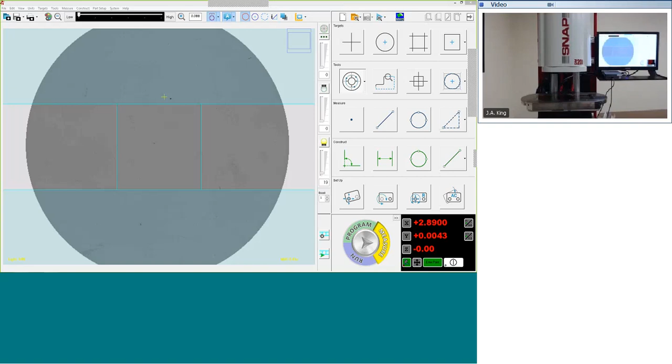I've got a couple of parts with me that I'm going to demonstrate for you, and we'll demonstrate how the measurement happens. I'm going to back up and let Colin do my zoom in for me with the camera. He's actually bringing the camera in closer to the gauge so you can see it.

You should have 2 panels on your screen, one showing the machine, the other showing the software on my screen. With the machine, the only thing we're going to see today is lighting and things that are moving. So let's talk about a couple of things to measure.

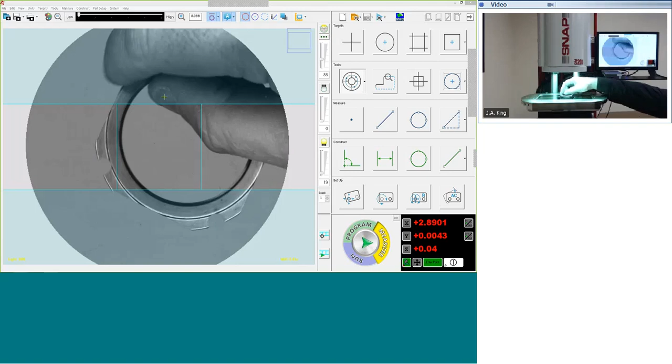I'm going to bring in a part. You can see this ring, we call it a gasket. You can see it on the stage now, and you can see the size of it.

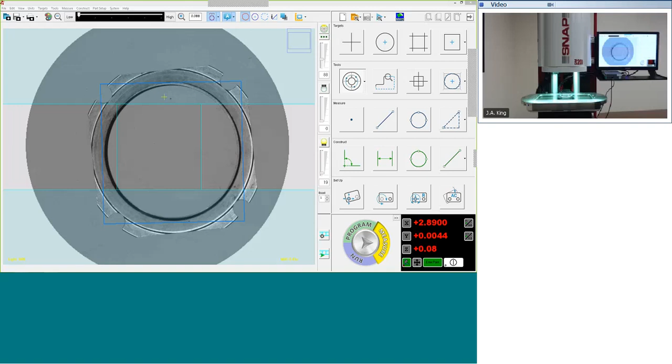You can also see, I put a little top light here so you can see it. You see on the screen that this unit, the whole part, is constantly in focus, which is unique to these type systems. They have large depth of field, meaning that we can measure all parts without having to refocus. The system is always in focus. There are some optimal locations, but for the most part, it's always in focus. As we change mag, that focal depth becomes smaller.

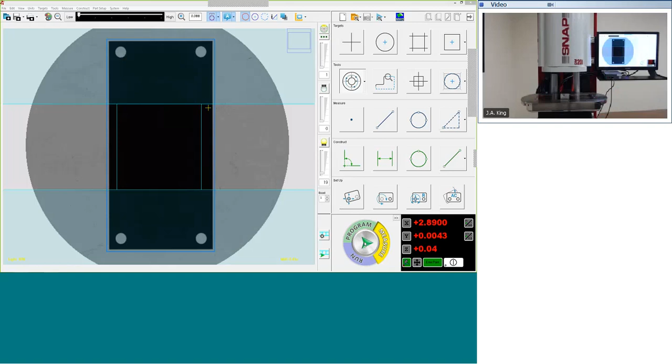The lenses on this system are fully telecentric no matter where you are within the path, meaning that we can lower the stage, as we're doing now, and you can still see the part is still well in focus, and we can raise the stage. Anywhere we take our measurement within this stage volume, our lenses are fully telecentric through the entire zoom range. Basically what that means is that wherever you are in the zoom field, the particular size of the part that we measure stays that way throughout the focal length of the camera.

So that's looking at that part. I'm going to put another part on the stage. It's just a block, if you will.

Let's talk about how we measure this. A simple walk-up measurement is just putting the part on the stage, and on the software screen in the lower right-hand corner, you'll see a wheel there, a colored wheel. This colored wheel has program, measure, and run. And then you'll see a green blinking arrow.

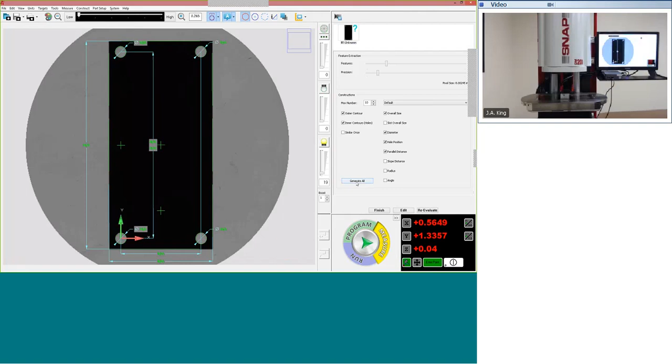That same blinking arrow, there's a button on the front of the machine that an operator can come press, and it's going to do the exact same thing. So when we press that green arrow...

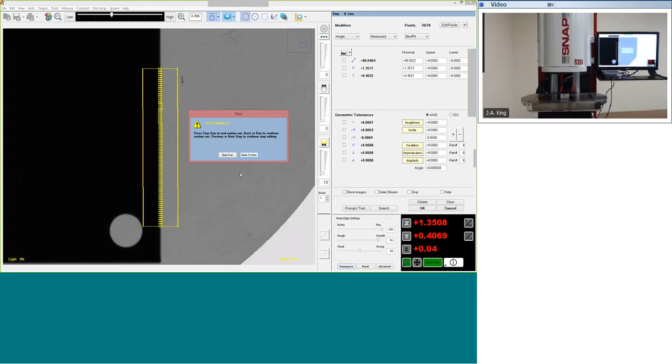The machine looks at the part that's there and does some automatic measurements for us. So we can see in the field of view that the machine picked up that there were 4 holes, and it measured all 4 holes. It also picked up distances between those holes, an overall height of the part, and a width.

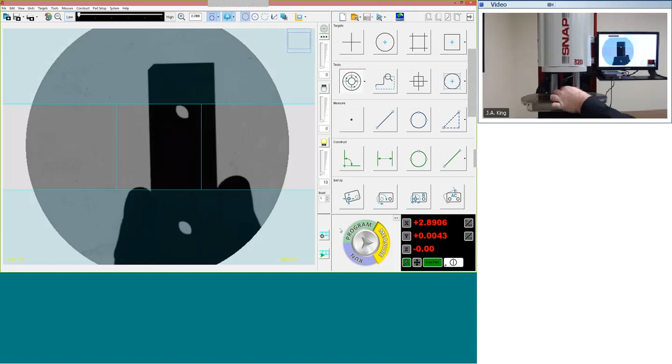And of course, with each one of these, we can also add and take away dimensions. Suppose this upper left-hand circle, showing in the screen up here, if we wanted to know the diameter of this circle, we can just highlight the dimensions, and it'll tell us what each one of those are.

Now this has become a program. We can select, over on the right-hand side of the screen, we have a button here that says Generate All.

And it's now complete. We select the Run key. I'm going to slow the speed down so we can see it. You can see the edge detection features going out and measuring each item that was identified.

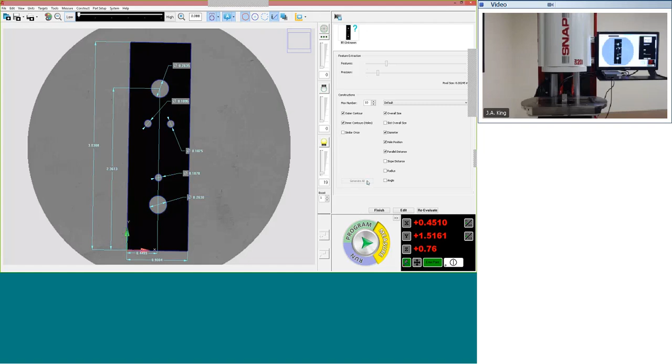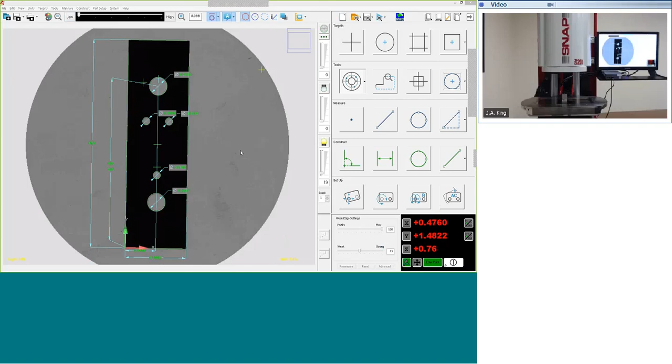Give it a moment to run there. Okay, so each item was identified and measurements taken on the screen. We can do the same thing by turning this part over.

Select New here, we don't want to save that. And of course we can go into our measure mode, and here we can adjust the stage. Let's say we have a really tall part, such as this one.

We'll put this on the stage and move the stage down a little bit. Under storing a new position, we'll select the measure icon, the green icon key. Just grabbing the part, and you can see that it has completed a measurement.

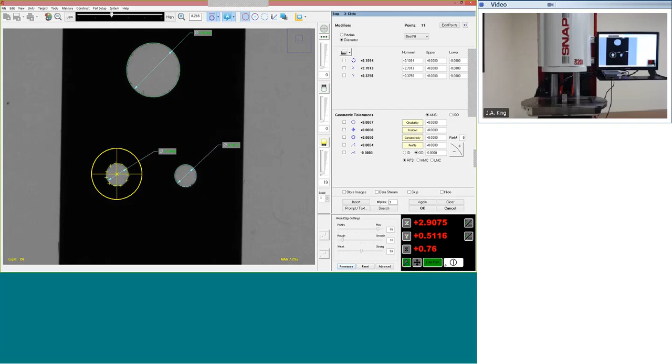We have length, width, circle diameters. It calculated an origin in this lower left-hand corner and went ahead and gave us the hole locations as well.

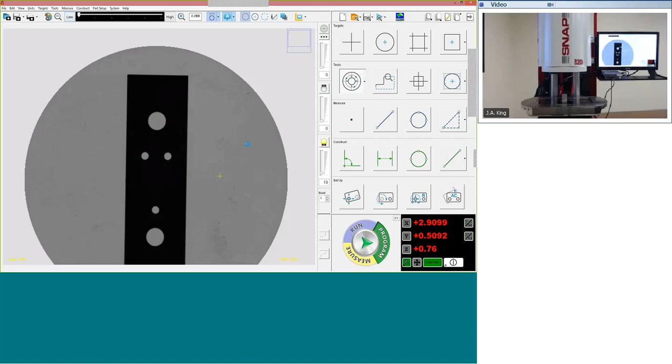We can select Generate All, and we'll go into our program mode—excuse me, our edit mode. Run this. Again, I've got this running slow here so we can see the edge detection. Select Finish.

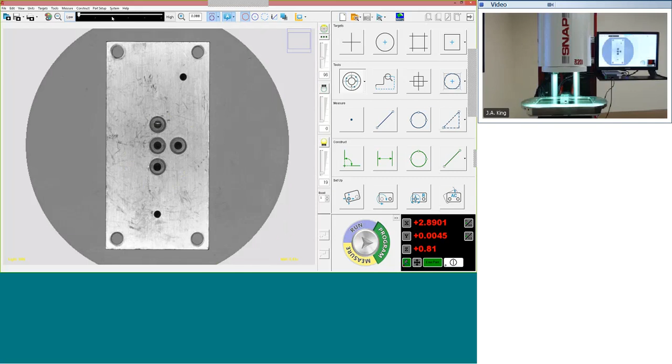We can also add items if we wish, so we have edge detection tools available as well. If you just want to come up and start measuring items, we have what's called a feature finder. If we just want to know the diameter of a circle, we can zoom in—we still have the full 4 inches available for the field of view.

You notice I can move the part around and not actually move the stage. So even though we're zoomed in looking at a smaller area, we can still see a complete 4 inches in the field of view.

And from here we just click on that circle, and it gives us this diameter. We could do the others as well. Give that a double click, and we can measure this diameter as well—this is that 100 thousandths diameter.

And go over and measure again. So you can just see with a couple of button clicks, all I do is come up and double click these two circles. We can measure diameters, and we can also get length and width. We want to know the width between those two—just click the width icon, and it gives me the width of 337 thousandths between those two.

So just walking up and measuring a part is very simple as well. You just put the part on the stage, and with a few mouse clicks, we're able to generate length and width.

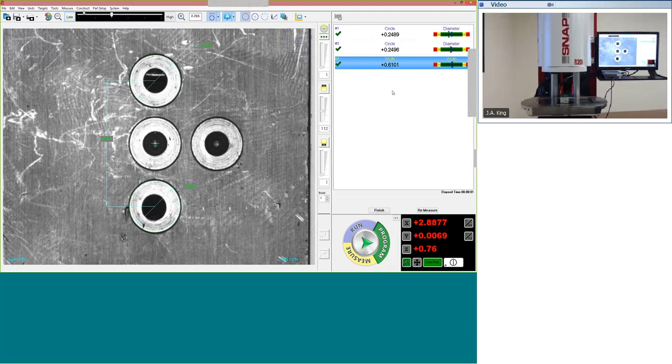So if we want to measure, let's say, some chamfer diameters, we can do the same. Basically it's 3 clicks, and I think you can see around the outside of the screen there are some points—I'll make these a brighter color so you can see that. We have a series of points; we took 23 points just that quick and measured that diameter there, that counterbore.

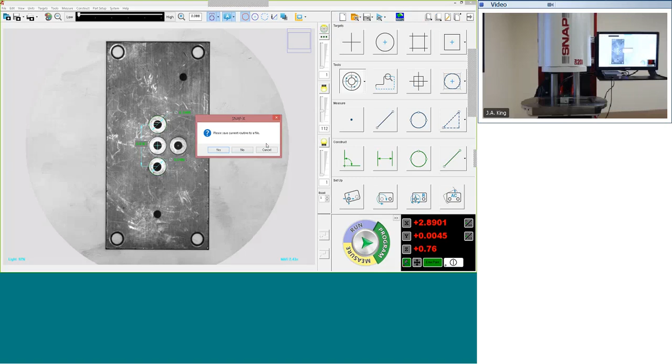I'm going to select to keep that counterbore and put a tolerance on it. It's a quarter inch, I'll put a tolerance of plus or minus 5 thousandths. We'll grab the bottom one as well—another quarter inch counterbore—and do the same, plus or minus 5 thousandths.

And let's do the width, or distance, between those two counterbores. We can see that on the screen there—that width is 610. We'll put this one at 610 plus or minus 2 thousandths. So we've applied tolerances associated with that.

Within this screen on the right-hand side, you can kind of see this little scale that comes up. We can send this, almost like an SPC deal, to SPC and do live real-time SPC through QC Calc. We can show X bar and R charts, run charts, CPK value, and do that live as well.

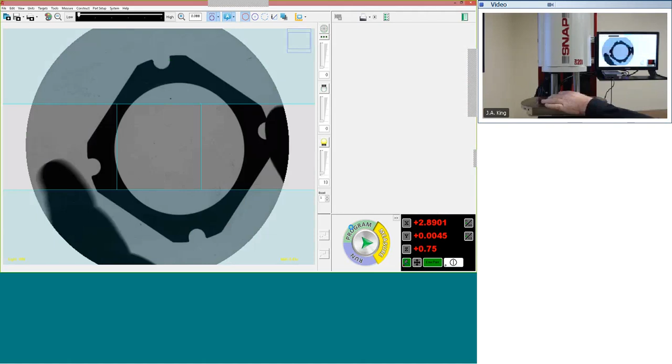So basically I just measured these 2 circles and asked for a width, selecting the run key. It measures those 2 circles and the width, and once we have a program written with tolerancing, it shows up on the front end of the screen whether the part is good or bad. It gives me a checkbox and says yes, your 3 dimensions that you asked for—circle and width—are all within specification, and they're good.

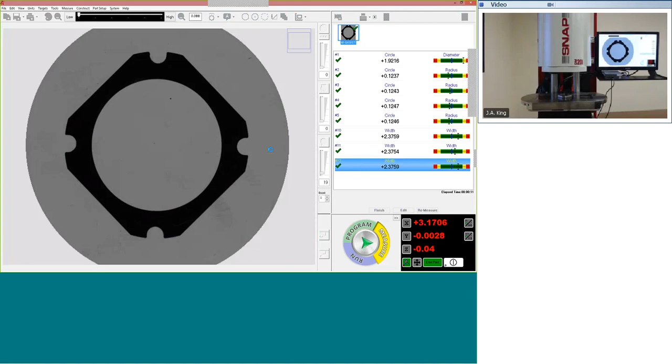So that's the basic programming of what this thing can do. Once we have a program, it has the ability to measure multiple parts and see things. What I mean by see things is it can determine what part is located on the stage.

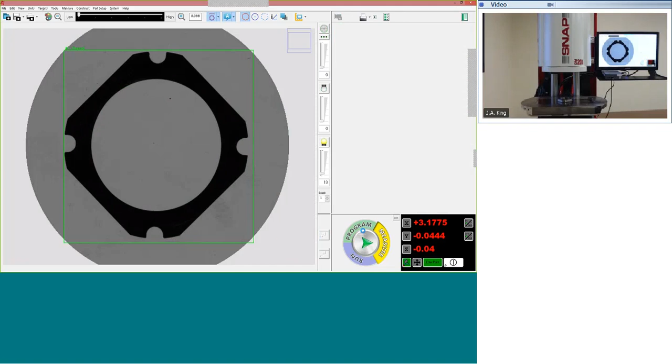I'm going to come back to our original part, the gasket, which has a routine. If we do the same thing in the measure mode for the operator, we select the green flashing button. The machine is going to take an image, recognize that part that already has a routine, and run that routine. We'll select the play button. It recognizes the gasket routine and moves the stage to where it was measured, and it's completed its measurement.

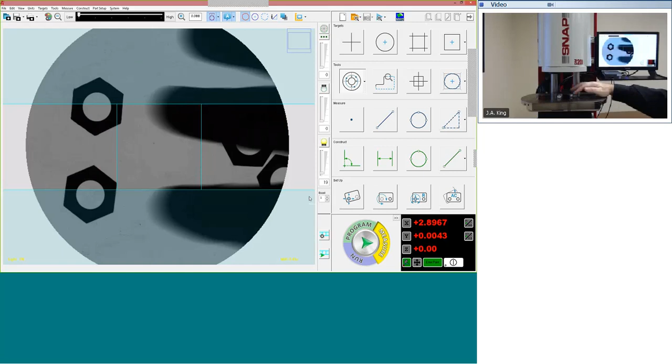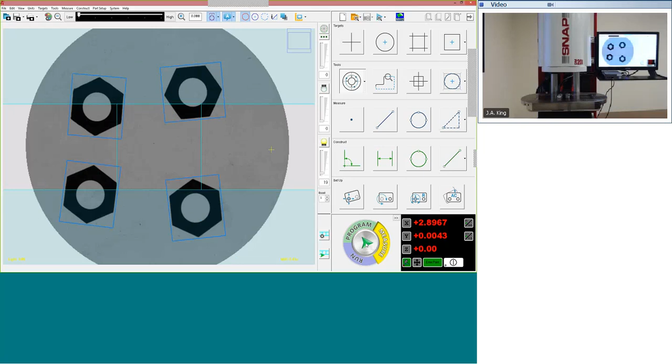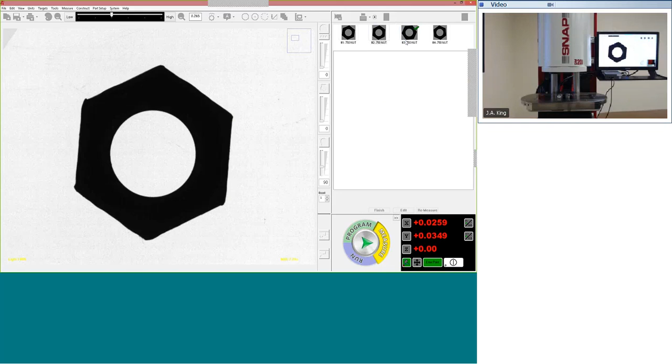For example, if I select Finish here, let's rotate the part on its side and reload it. We'll select measure. It's going to do the same thing. We'll take the picture, it says it's preparing its image. It will go through and look for that part in the library. It found that part, and it is running.

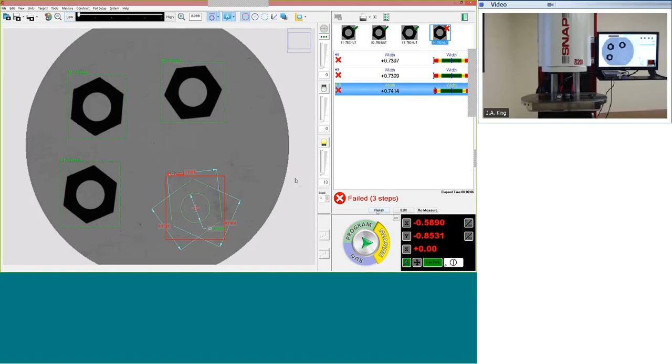So here we took this. It measured the part, saw it in a different orientation, and grabbed the part just fine. So we'll show a couple more examples. I'm going to move our stage and reset here, set the stage there.

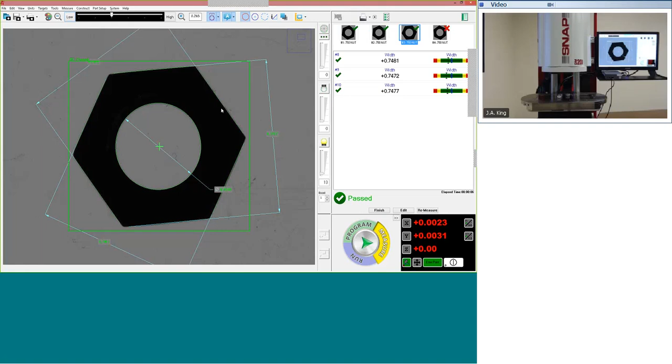We select the measure icon. The machine is preparing an image, and it's going to look for a program that fits those parts. It found all 4 of those parts. I have this slowed down quite a bit so the video comes through. So it's going to each one of these parts, measuring the outside edge of each one and the internal diameter. It did find one that was out of specification.

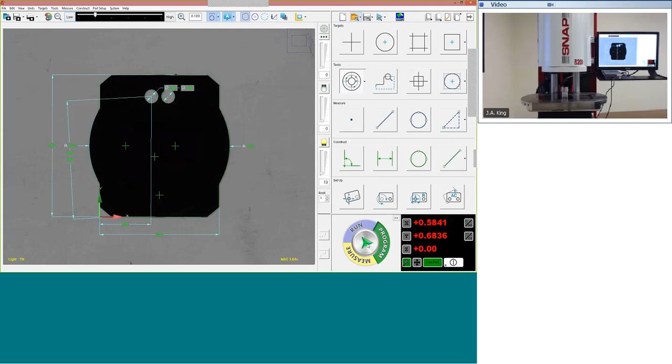What's nice here is it shows on the screen green boxes around the parts that passed and a red box around the part that did not. In the top right of the screen, the visual for the operator, we have 3 check boxes. It found 4 parts, and it found the 4th part being out of specification. So it kind of tells you which one you can go out on the stage and pick up and put in the bad bin.

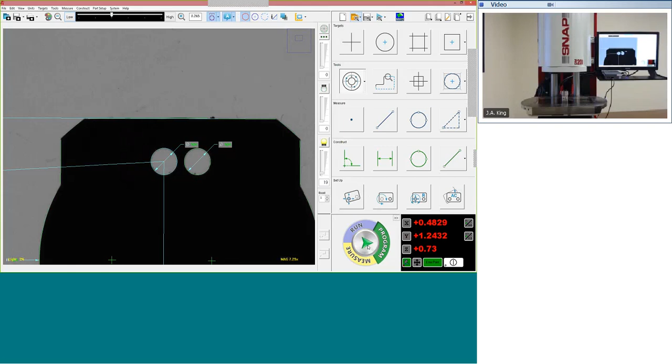Any one of the other parts, if we want to view the dimensions, we just select the part we want to view. It puts that part in full screen field and gives us the dimensions along the sides, so we can see the width of each one and the diameter. We can cursor through each part individually.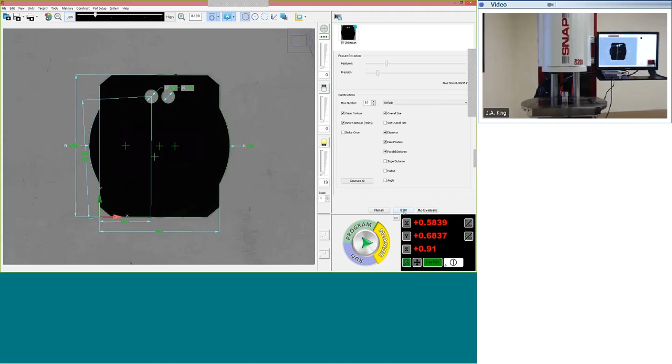So it's a really good tool for doing part sorting as well. If you have a lot of parts on there, you would let it generate the program for one of those and put as many parts on the stage as you want. It'll scroll through, count them for you, measure them, let you know if any are bad, and point you toward which one is. So if you have 100 parts up there, that could be hard to figure out otherwise.

Let's do another part on the stage. See the size of that part as well, and we'll do this one and let it generate a routine, and we'll save that routine. So I'll show you the process for registering a new part in the program.

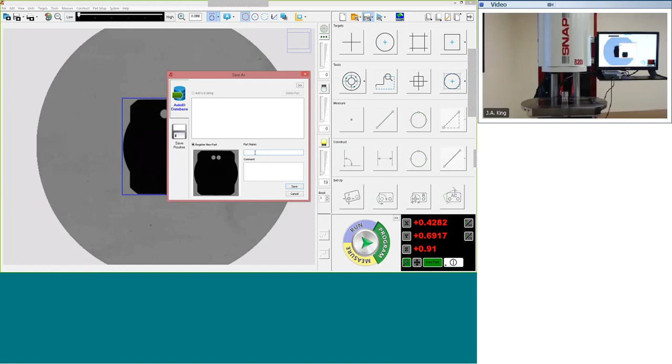Under the measurement, we'll select the measure icon. It's preparing its image. So it found this part, and it's going to generate a routine for it. We have some hole locations, sort of thing there.

The process here is to select Generate All. So it has those. I'm going to run this routine. We'll speed it back up.

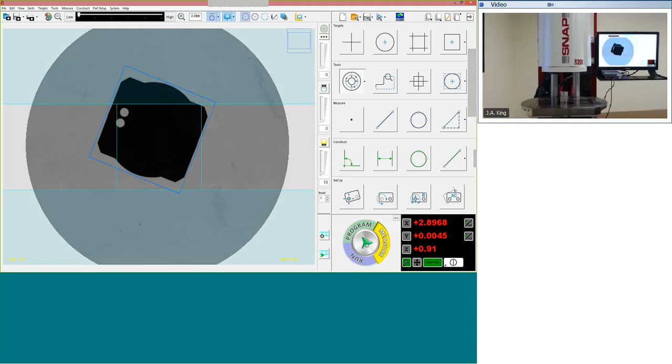All right, so we need to move our stage down just a little bit. A little bit tall there. Do our measurement. Perfect. Generate all.

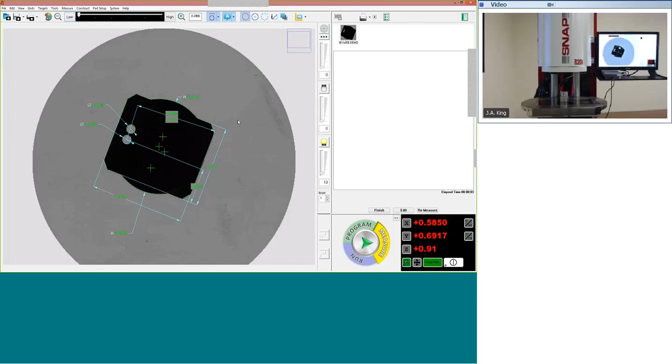All right, the machine worked its way around the part. See what we got. So we go back to our low settings, our low mag. You see here on one of the holes that gave me the dimension, this is both X and Y. If we hover over that dimension, it gives me the option to choose which I want to display, and I want to display the Y-axis. So now I know the height of those holes from this bottom flat.

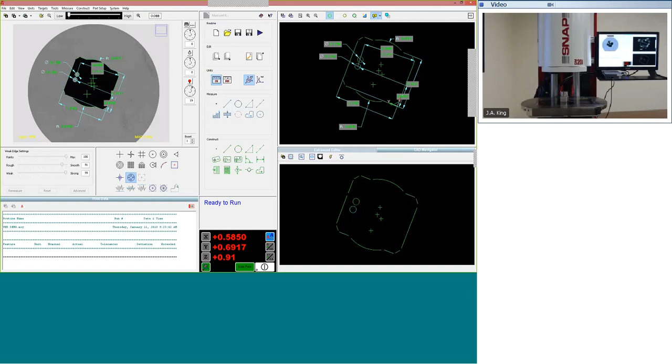This looks like a program that we want to save, and we want to keep this. We register what's called registering the part. So we're going to select the registration icon. Here it's asking me to name it for a part. We'll call this one Web Demo. And select Save. And that's it. That program is done.

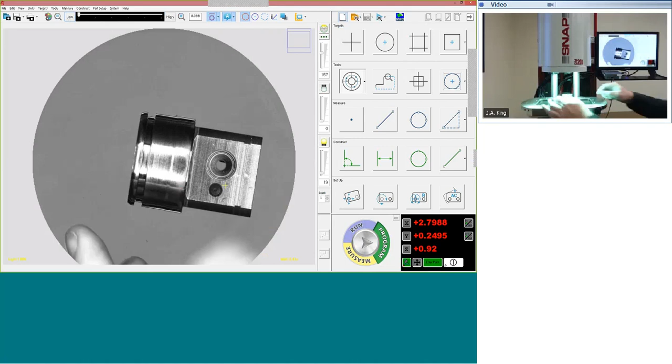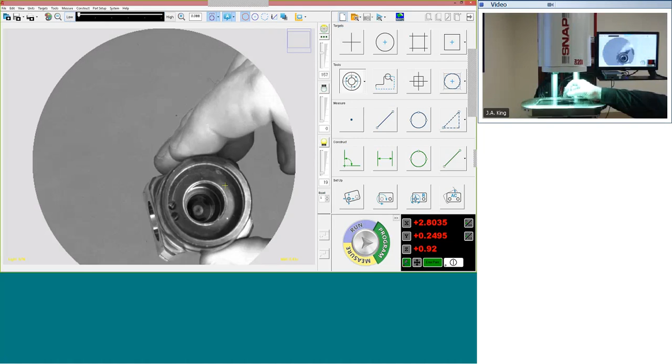We can take that part now, remove it from the stage, set it in any orientation that we want. Go back into our measure mode and just click the run icon. It's going to look for that part. It found it, and now it's doing its measurement. And there's the results.

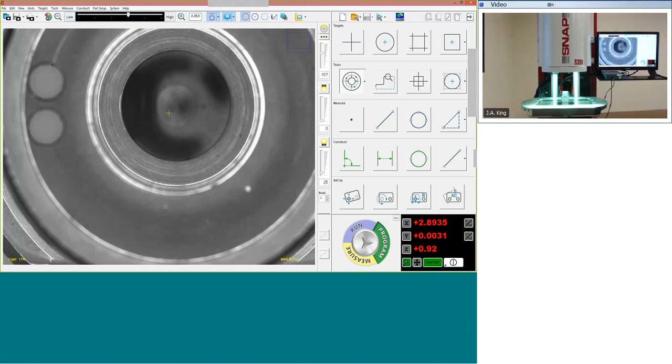So the takeaway here is it's not a program-intense machine. You put the part under there, you press the go button, it measures all the outside features on its own. It generates the lengths, diameters, and it generates the edge detection tools on its own. So for an operator, you don't really have to do much other than save the image, so it links the image to that file program.

Anytime we want to make a change, we do have another screen. I will show this screen over here. This allows you to ask for particular dimensions that may not have shown on the original pass. You can move your origins around, you can change different lengths and widths. We also have a CAD Navigator that's available, so if you would rather program the CAD model, you can do that as well. You can program the DXF file, so it's a 2D DXF programming option.

But this is the general basics of the Snap 200. I can open the floor for questions. We'll show a couple other features here.

You can see that we're in focus. It also makes for a great visual inspection tool. One of the things that we can do is illuminate the part. Of course, you can see, because it's in focus, that video may be coming in as a little sketchy. But because it's in focus throughout its range, you can certainly look down into the bottom of objects. We can measure down to the bottom of those objects.

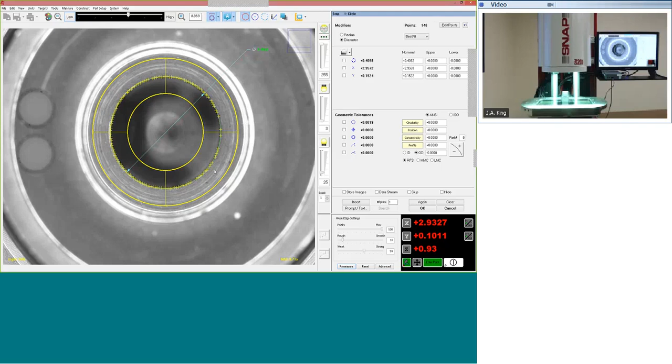Yes, this machine is production floor ready. There's no air required for it. On this, from the Snap series, the only thing that moves is if you get a stage, there's a moving stage. But other than that, even in the simplest form, our Snap 100, which has no moving stage, there are no moving parts. So you can do 4-inch field of view measurements all day. The only thing you have to take care of is the top of your stage glass. If you're in an oily environment, you may have to wipe it once in a while to keep it clean.

How much space does it need? Are there any special requirements, like a heavy-duty table or draft shielding, which are necessary?

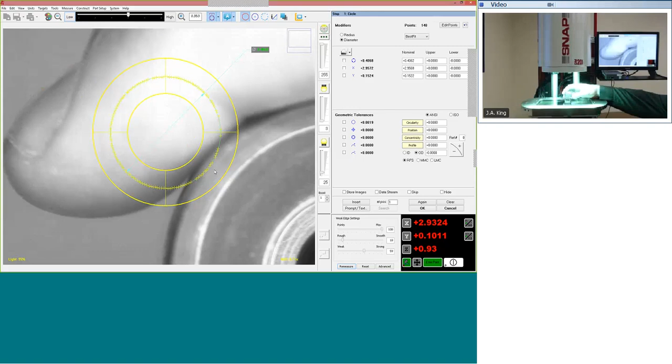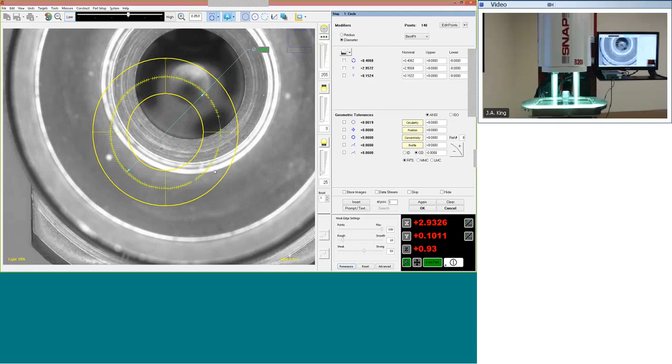Okay, perfect. So depending on the size of the machine, this particular one, the Snap 200, has a moving stage, and the next one up is the 300, which has a 12-inch moving stage. You'd need an area about 2 feet deep and about 18 inches wide for that size of machine. For the Snap 100, it's about 14 inches deep, and I'd say maybe the same in width.

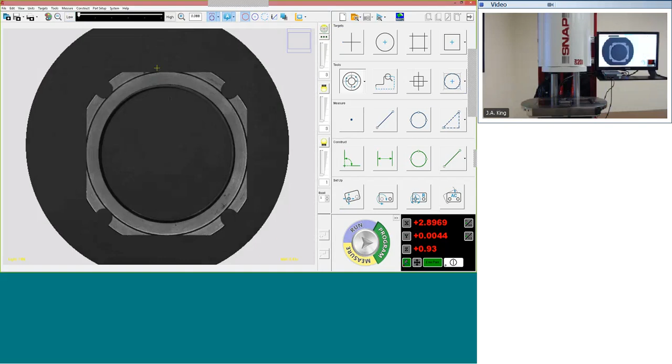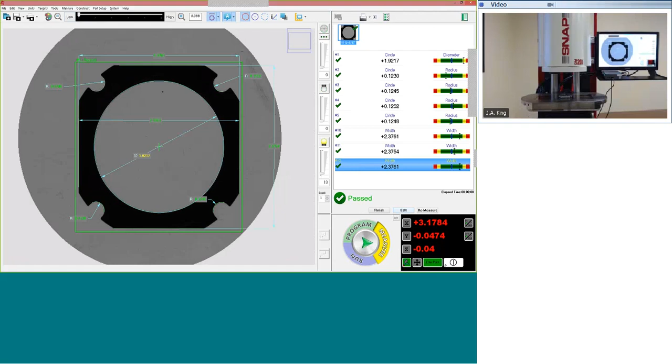As far as shielding goes, I haven't had to have any shields built around it. If it's a light shielding question, depending on where you set it, right now in this room we have a lot of overhead lighting and it doesn't seem to interfere with these shiny parts. I haven't seen reflections come off of that, so I haven't seen the need for shielding yet, though I haven't been in every situation. Unless there's an overhead light shining straight down on the stage with a shiny part, you may have to put a light shield there to block the light from above.

As far as system types, do you offer a system with a touch probe? Oh, great question.

Yes is the answer, but that's offered on our floor standing units. We have a Snap 350, which is a 14-inch by 14-inch stage, and that machine can be equipped with a touch probe if you want to measure depth. So if you wanted to measure how deep the part is, you could go several inches deep, and you could also have a star probe attached, so if we wanted to measure a hole going into the side of the part, the touch probe can come down at a 90-degree angle and measure that hole as well. So we have the capability to add three-dimensional measurement with that system by adding a touch probe. The touch probes are standard Renishaw touch probes that you'd find on 99% of the CMMs out there.

Can you show a measurement report for a part? Yes, I can. Yes, I can.

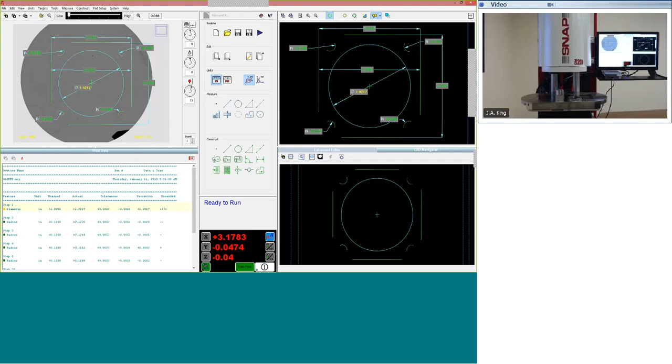Does JA King offer service? Yes. JA King handles these systems from right from the beginning. Once the system is purchased, it's shipped to your facility, and we'll send a technician out to do the complete installation, training, and calibration. Any future services as well, we offer that. We take care of these machines 100%.